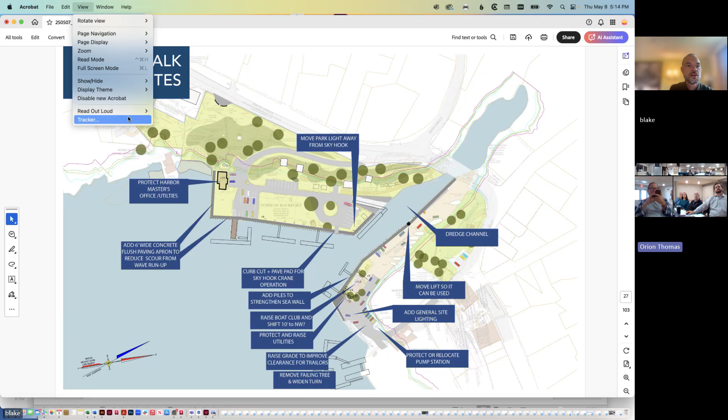Ryan, is it possible to make that full screen? Yeah, I can see back here. Let me see what I can do on my end. I can make it a bit larger. Hopefully that helps. Yeah, that's better.

Oh perfect, okay great. So then after engaging with the boat club folks, we continued on and sequentially made our way around the harbor. I'll just start on this side. So there's a pump station that's lower lying, and there's a need to protect or relocate that facility to ensure it's operable into the future.

There was a suggestion when we were looking at the interface between this area and Rockport Marine that currently there's a little bit of a challenge getting trailers and things into Rockport Marine just at this corner, because those of you familiar may know there's an existing tree out there. The radius is a little bit tight and the tree is not doing well, it's in poor condition. Also, if you look at the grade of the road, what we were hearing is there's a high point that's challenged for clearance for some of those trailers.

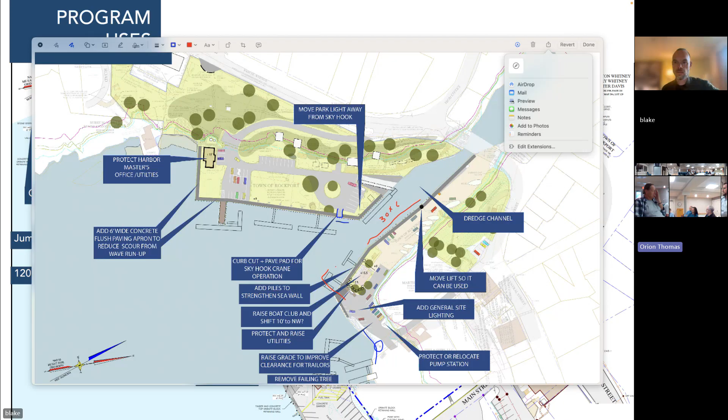It would be helpful for me to understand, so how many years ago did Skyhook operate on the other side? When they first started, I think they've had 2 full seasons where they are now. The first year they tried to do it, I said no, you've got to try it over on the other side, on the dirt side, and that was an absolute calamity.

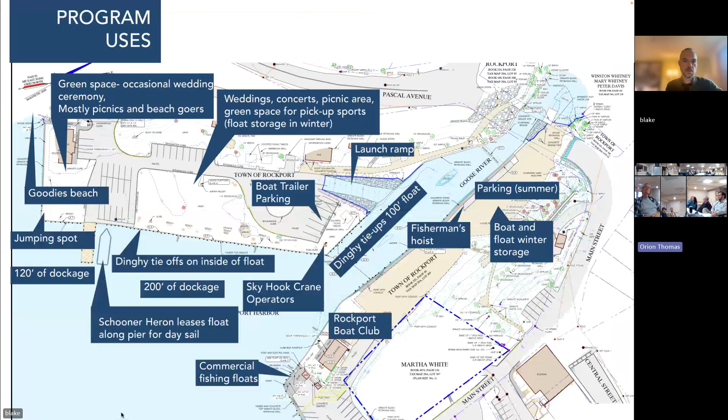So were they near where the hoist is now? They were kind of up by the boat club fence. I don't know if you knew where the best boat spot used to be. It's going to be the closest spot to the boat club.

Yeah, and the conflict is that that's true for the fishermen and for the sailboats - they put their boat alongside, load their gear on. It was not... maybe there's a solution I'm unaware of, maybe if we dredge they could go up the river a little more.

I don't know, but I do know that if the decision is not to put Skyhook there, that wrapped corner space will be a great spot for more dinghies. It's no man's land - it's all about priorities, what we want to prioritize. That's a service people want and we want to see happen somewhere. If it's not going to be there... see those floats down in the corner? If that could continue that float system...

And more, what were some of the issues on the other side, the dirt side? What were the calamities? Well, their boom truck's pretty big, so if they're parallel they have to set up the mast - they need a little bit of real estate. They're bringing their masts in, parking is the total issue, and they have to lay them out to rig them up before they put them on. It's narrow in there, so you get people dropping their kids off, general traffic coming through, then fishermen coming in to load their traps.

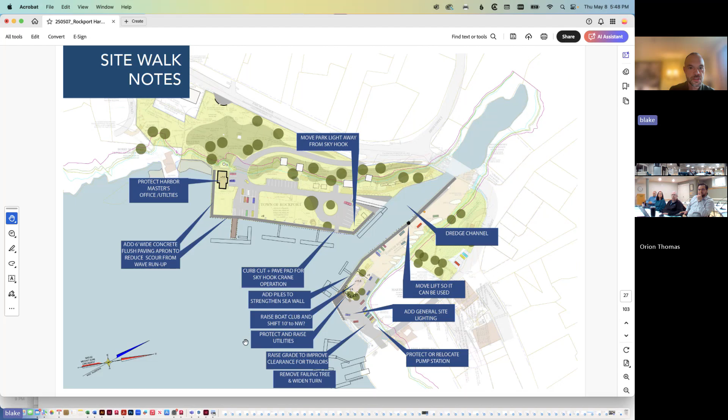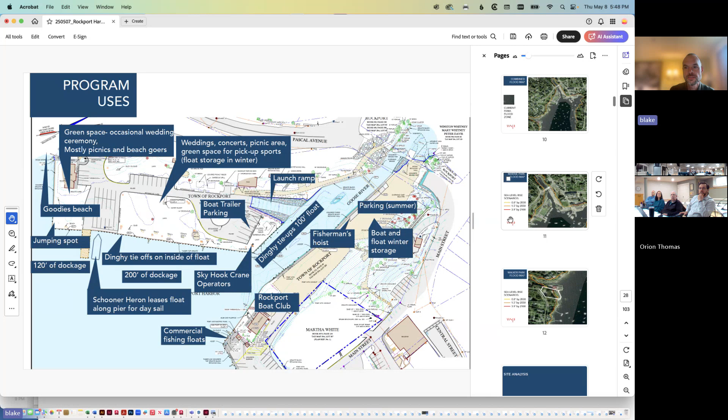So those were just some notes we made during the site walk. And what we've started to develop is the presentation deck, a draft version for the next public meeting. I might go back to the beginning so we can flip through and give you all a sense of what we had in mind, and that way you can let us know what could be better. We've got about 3 weeks to refine this.

Some of the folks who would attend, I guess I can go into full screen mode for y'all. Some folks who will attend this session are likely new to the project, but we don't want to repeat in full what we did in the first one.

So I think quickly we would just recap the project scope, and then we would highlight that the limits are just the public areas that include Marine Park and Walker Park. We'd show them that, as they're probably well aware, there's been impacts from storms, and so this is an opportunity to be proactive instead of reactive.

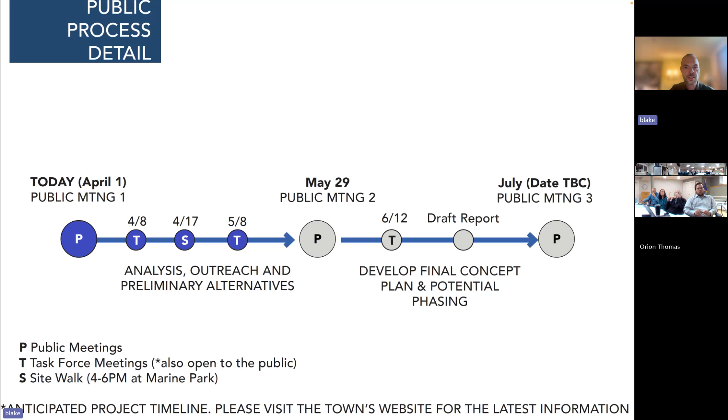We can highlight the project schedule for folks so they understand where we've been and where we're going. We would highlight that they're at the midpoint with the May 29th meeting, and the goal of this meeting is to share some preliminary ideas. There's still time to refine those before a meeting in July. In between those larger public meetings are a series of task force meetings, and also we did that site walk. So this just shows that chronology.

So that was shared with the Harbor Committee, Conservation Commission, Parks and Beautification Commission, the task force, and general community members. So most of the results, by the time we had 131 results, were from the community at large.

We asked if they were aware that flooding has already impacted Rockport during storm events. Almost everyone was aware, but a few people weren't. That tells us we probably don't need to spend a heck of a lot of time recapping the storm activity. I think people are familiar.

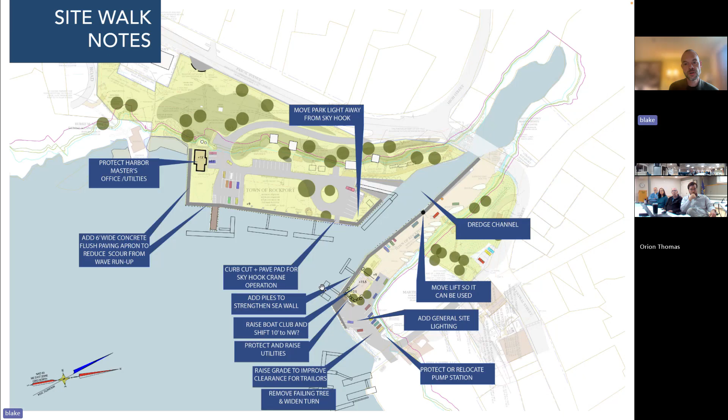We would share the site walk feedback we were thinking after that survey feedback. Just as we just did for this meeting, we can go through this slide. We'll make those updates that you all had mentioned and incorporate that into this one. Then we'll go into 6 key drivers.

Because the responses are so varied, we thought it might be helpful to look at trends. Before we came up with resilience strategies, we thought it would be important to distill all of that information into some guiding principles. So the first key driver is to support the working waterfront.

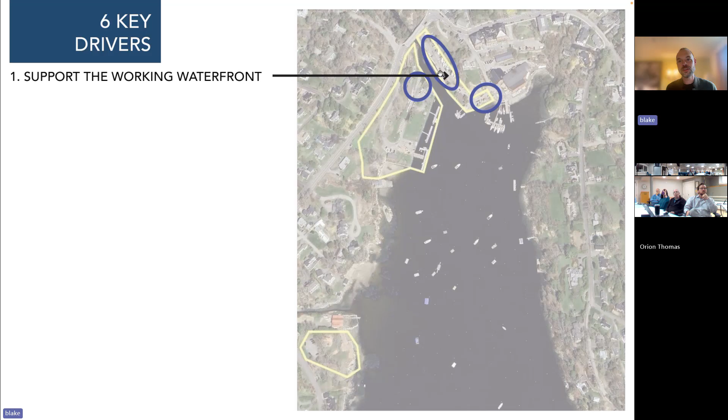I can't tell you how many times I've heard that this boat ramp is absolutely essential. We've talked in great detail about all the activity over here. We certainly understand that that's a key driver for this project. Not to mention that there's likely $2 million in funding to help preserve that into the future, which would be amazing.

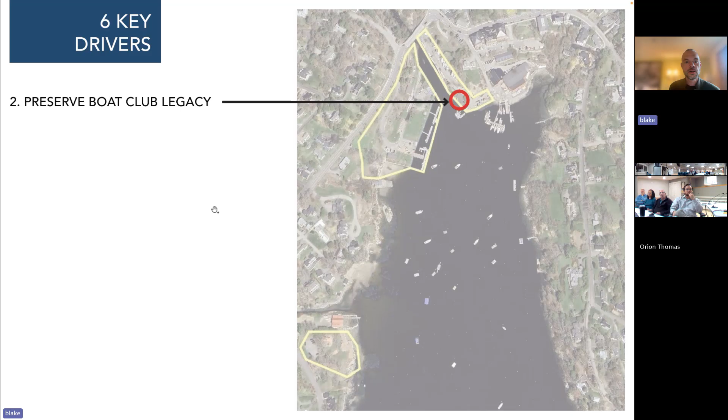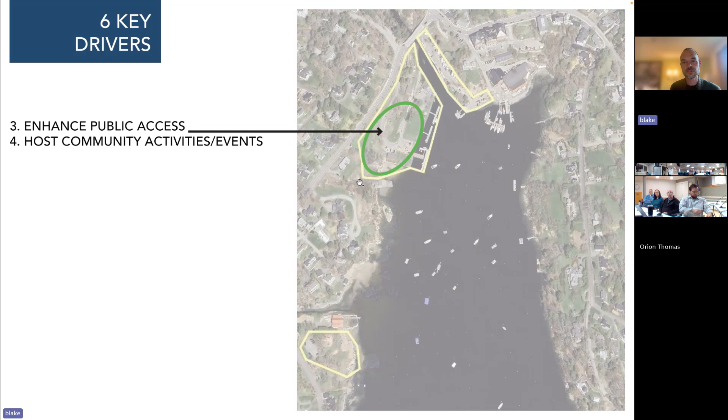And others said that they look to this as a spot to host community activities and events. I think in the last round we talked about some of those, like the donut festivals and various things, but really it's the day-to-day activities also that this open space serves and is so vital.

There's enabling harbor operations - it's awesome that Abby's been so giving of her time. We've learned a lot about the harbor from the harbor master, and just given the location of the harbor master's office and flood mapping, there needs to be thought given to how those operations continue to work in the future.

And then not to forget about Walker Park - that is a really vibrant spot for youth in particular, but another beautiful way to access nature in the harbor. So that might be an opportunity to foster ecology, education, and play.

If you combine all those things, what is starting to appear to us is that hopefully the resulting recommendation isn't one that favors any one group at the expense of the others. So it should be, we feel, to succeed, a balanced solution - where it works for the working waterfront, it still is an awesome public open space, and there's opportunities to enhance ecology. This diagram is getting at the idea that we don't want folks to feel like they need a singular solution, that it should be multifaceted and balanced.

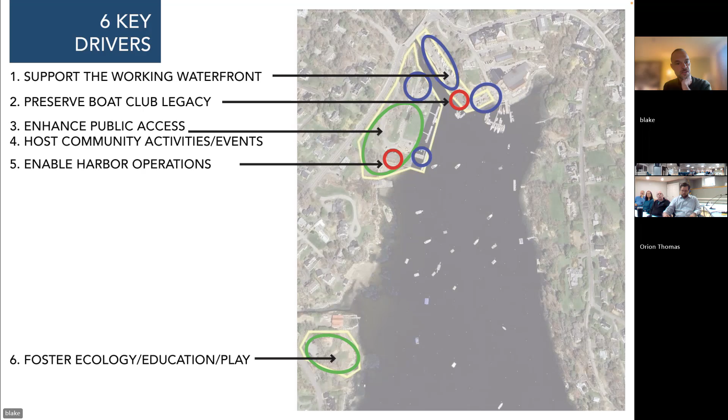So then for draft resilience strategies, what we started to do is just take the site survey and color it in so that hopefully it's more easily understood.

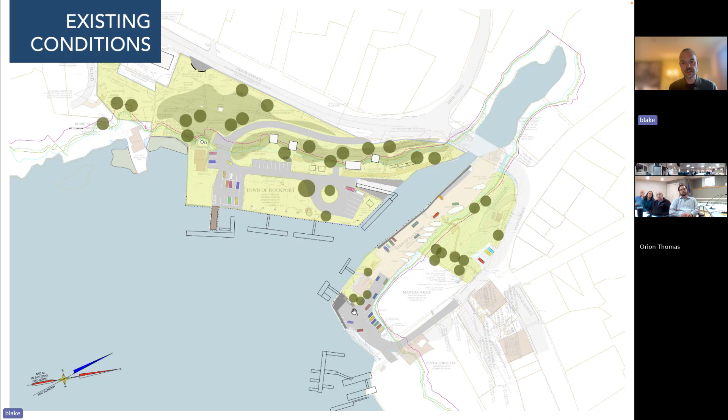So this is just existing conditions that you see today. We can orient people, center town's over here. That's your access in as you currently have it today. The darker green is the sloped area. The white things are your kilns. The light gray is parking and access. And over here, where it's sort of peach, that's the gravel zone for the commercial area. The lighter gray, that's your paved zone, et cetera.

And then we'll talk, I guess, about each of the potential elements. So the first one was just looking at Rockport Boat Club.

And you're all familiar that that's impacted by storms, not just today, but as Todd had shown in the last meeting, by 2100, during a storm event, it is potentially very impacted based on these flood scenarios.

So this building is not very big, which is a good thing. It seems like it would make a lot of sense to elevate this structure. The current elevation is at 9. We're thinking that elevating the finished floor to around 15.5 might be the way to go, because that would mean that your finished floor is meeting your midterm projections, even for the 1% base flood elevation scenario. And if you're going through the expense of lifting a building, you don't really want to go up 1 foot at a time and in 10 years have the same problem on your hands. So the thinking is that you look at that time horizon.

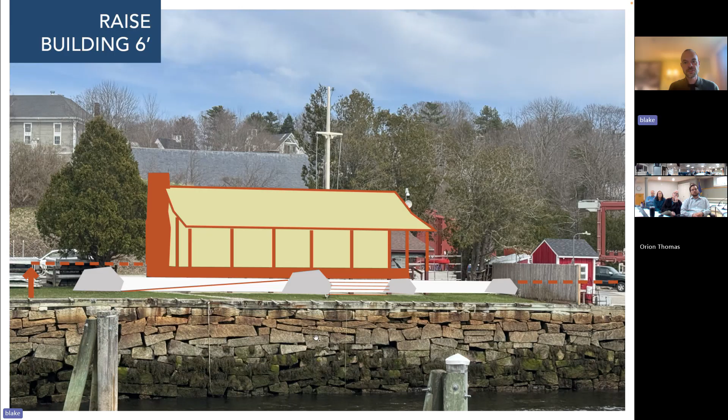So here's an image of the boat club today. Here's just a mock-up of how that might be facilitated. You could raise the building about 6 feet, but you might want to break that into 2 transitions. So there could be about a 3-foot step from the porch down to a landing zone surrounding the building. And then from there, it might be another 3 feet down to existing grade.

And, of course, the masonry chimney piece would need to be considered, but the timber frame building itself should be able to be lifted. Whether they just elect to rebuild the fireplace and that sort of thing, I think that could be done. But this graphic is just saying that might be a way for this building to have minimal change. But I can pause there. I don't know if Nancy or others want to comment on that piece of it.

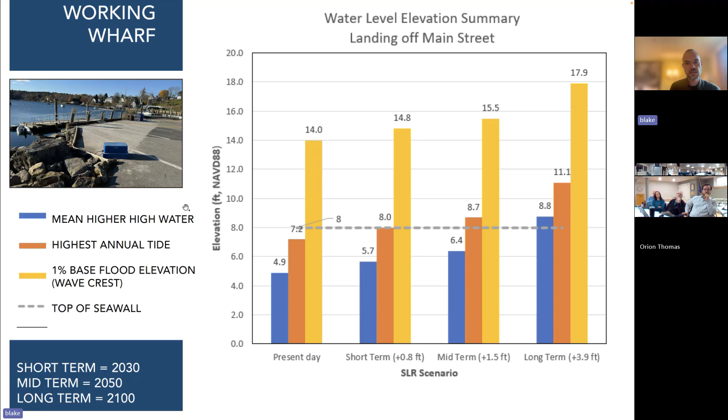It's not so much that this area can't be overtopped. Water going over asphalt or concrete in the middle of a really severe storm event isn't ruining the commercial fishing activity. The issue is some of the utilities in this area, any structures that are part of the operations, need to be located in such a way that they're not impacted.

But if you raise grade like 2 feet, then it might actually work out where you have a better transition over to the boat club, because you've just raised the boat club 6 feet. So if you raise grade here too, then you don't end up with funny conditions where the commercial fishing zone interfaces with the boat club.

And also it sounded like there would be some advantages if this grade is slightly raised from Rockport Marine's standpoint, as I had mentioned, where there was low clearance for trailers. And then from there, you could locally elevate the utilities and any sort of structure above that. So this would still overtop in some scenarios if it's 2 feet higher, but I don't think that's a problem.

And Todd Coffin had said he would just want to model elevating the grade to make sure that there's no unintended consequences from wave energy reverberating off of this. Today's discussion talked a little bit about what happens if there's an extension on this corner. I'm sure Todd Coffin would want to put that in the model too. But if that's just on piles, then I can't imagine that there's a lot of impact associated with that.

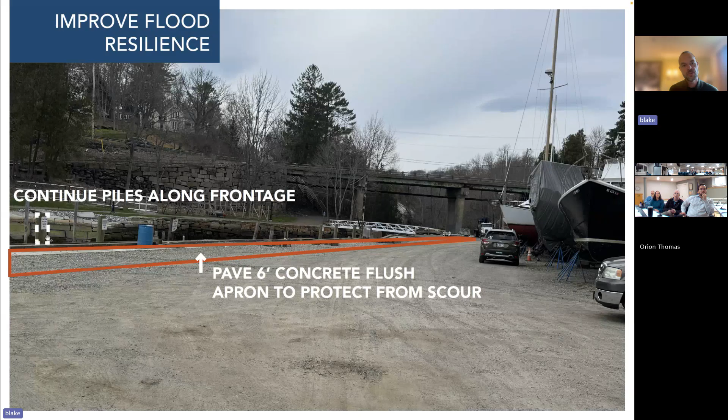And then additional lighting, it could be done in a number of ways, but I just indicated that that would be captured. And then also on this edge of the commercial fishing zone, we had talked about paving a 6 feet concrete apron to protect from scour. So that's captured. And these piles that you see here could be continued along the waterfront.

For Skyhook, if it did move to the working waterfront side, there are examples of kind of cool supergraphics. They have been used in commercial settings also for designating where different uses happen. So one thought was, I know that people think of the park side as sort of the park and this side as the working waterfront.

But if you're going through the process of elevating a portion of it and paving it, and you're trying to make sure that people know where to go, or if you're a pedestrian, like this is not the middle of the walkway, this is where Skyhook goes. There could be some interesting or creative ways to mark uses so that it's clear to the public and easier for the operators to function.

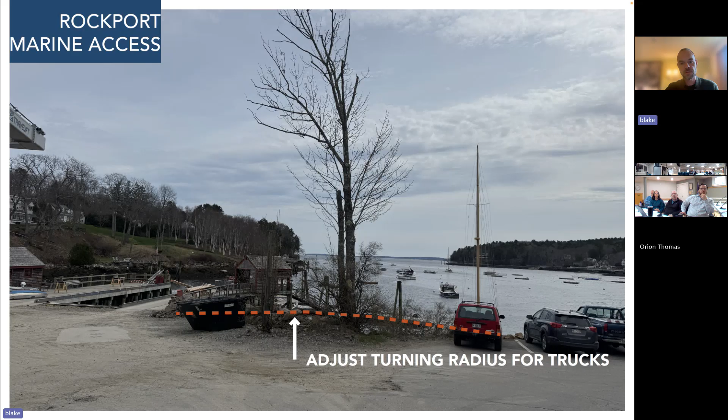This was that corner toward Rockport Marine where we need to adjust the turning radius. You can see the state of that tree on the last visit. It's not doing so well. And oftentimes where there are projects like this, rather than trying to keep a poorly located tree that's failing, there's an opportunity to plant new trees in better locations that are healthy and actually in the long term are going to provide a lot more habitat than what this thing would do. So there might be a scenario like that for those who might be concerned about that particular tree.

So any questions on that side before we go to the park side?

Yeah, when we were talking about raising the grade 2 feet, what do you do on the water side? And this actually applies to the whole area here. Do you just add more riprap, or do you put in those corrugated sheets, sheet piles, or do you just put more granite blocks? Adding pilings in front of the granite blocks just doesn't seem real strong. It certainly adds to the atmosphere, but are we gonna want to start putting in some of these sheet pilings to protect the granite behind it? How does that get handled?

Yeah, I think you asked a really good question. Todd Coffin has talked about the various options, and just as you were running through them, they have different pros and cons. We haven't landed on one specific edge condition just yet. The thought was first, if we test the waters with raising grade at this elevation, and folks are saying yes, that'd be helpful for the reasons you identified, and it would also work well with the boat club, then I think the next step is, okay, so what does that edge look like?

Even though the granite might look better to some, you might end up with riprap that's less costly here to save your pennies for something else that's more important. I could see it developing that way. I don't know if that makes sense. Yeah, sure, and it might be different solutions in different areas. Yes, I'm sure it would be as well.

So that was the commercial side of things. And then on the park side, after going back to the site a number of times and thinking about what we're learning through the discussions to date, it seems like this is not a location where every inch of this park needs to be waterproofed. Like we talked about with the commercial side, having waves come over the top can be acceptable, and there are lots of communities that live with floodable parks that are just designed to flood. The problem right now is that this park wasn't really designed to flood, so when it floods, it fails.

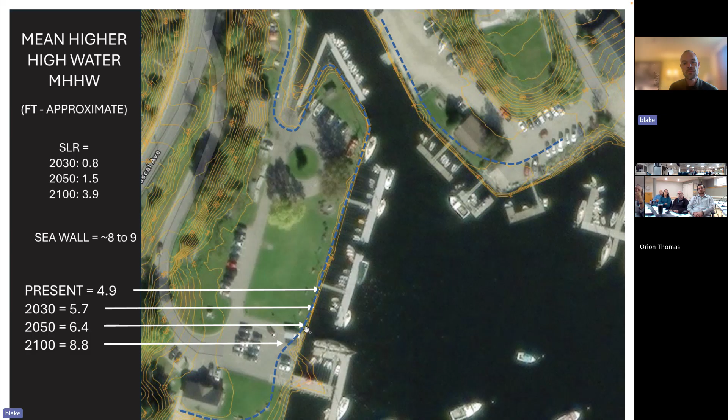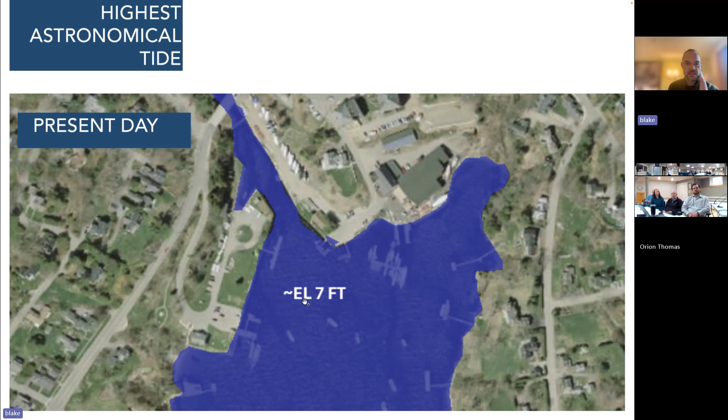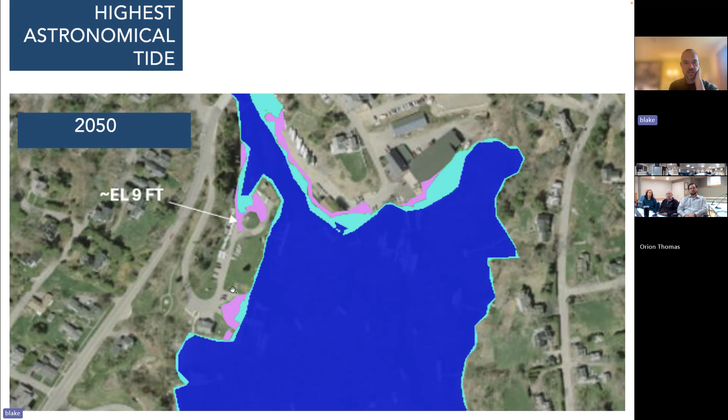So rather than trying to keep the water out 100%, the thinking is, what could we do to improve the resilience of the park and at the same time make it work for all the different uses that people have brought forward. This was showing the highest astronomical tide flooding in present day, 2030, 2050, and 2100. By 2100, you're up to 11 feet at the toe of slope. But it's incremental, so we may not have to make all the changes to this zone right away, because by 2050 it's anticipated there'd be a lot less flooding even during the highest astronomical tide.

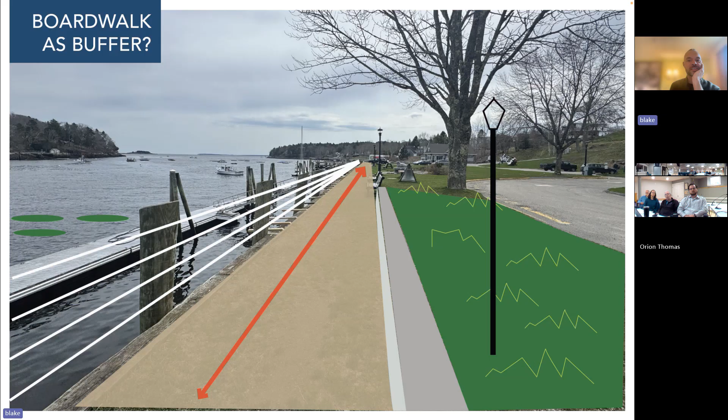So one thought was, if you were creating an apron to help reduce the amount of scour, could that ever become a sort of public boardwalk, giving you an accessible path at the edge of the park? One of the things folks think about when designing circulation networks and paths is what happens if you're in a wheelchair or a walker, how does everyone use this park? One thing that would be enhanced greatly by having a hardened surface at the edge is that it becomes universally accessible, basically better for ADA access. The surface could be raw concrete, but there are other projects where that concrete is laminated with timber, and this isn't the same construction as your typical flimsy deck. These things are built with details that are way more robust, anticipating that water will overtop.

But when it does flood, it's fine. It just floods in certain conditions, and then the flood waters withdraw and it's fine. So it could be a timber surface, stone, or just raw concrete. But the point is that maybe a circulation network develops that makes it more accessible and provides greater resilience, so you don't have to repair as much at the end of the day.

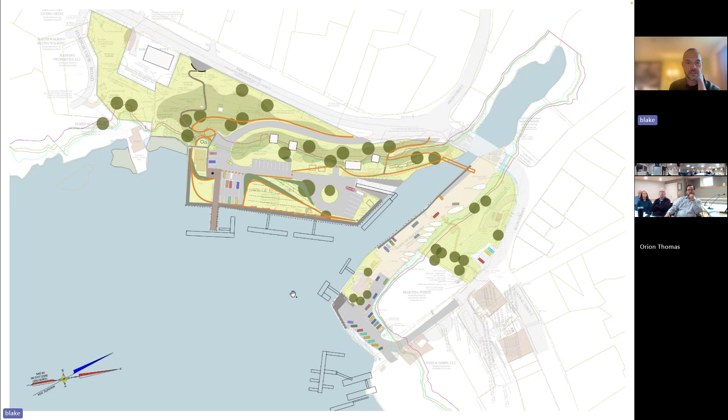And it would work much as it does today. But over time, you could fill in and raise portions of the park. We would see that happening through a landscape strategy. You've already got a really big slope leading from the park uphill to town.

But there could be additional topography or mounds created that help raise some portions of the park out of floodwaters over time, and also create spaces so that even if there's a turnaround or parking for the boat ramp on one side of the park, if you mound up toward that end, then when you're in the park you're not looking right at tailpipes and exhaust and everybody queuing. You're reoriented back toward the water because of the slope. So there could be some benefits to topography.

A lot of people would hope that the biodiversity of the park might be enhanced. Right now there's a lot of lawn, which requires a heck of a lot of mowing. If there are opportunities to create planting pockets in the park, you'd be creating more habitat for wildlife, also treating stormwater, and you'd have less to mow. So there might be a way to balance those things together.

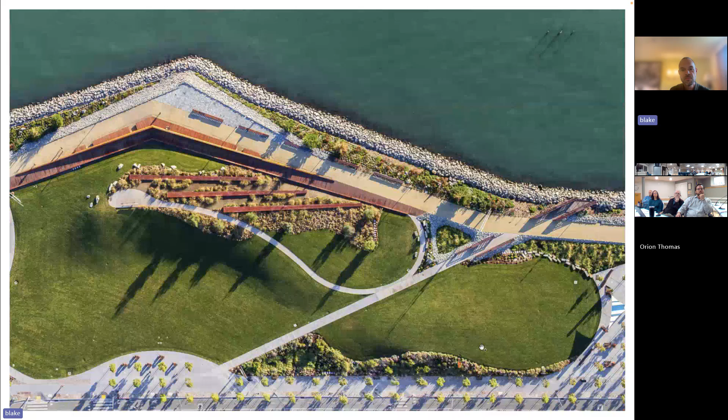These are other examples of how projects or communities have integrated topography along with a boardwalk at the edge. They could look more modern or more rustic, but the overall intent is that when you're making a floodable park and embracing change over time, it gets coordinated in this way. You'd still be able to have your bigger events out there.

Any comments on the park piece?

I mean, if it were to be hardened, then you're right, that might provide opportunity for access. I guess the other question is, we would probably want to have, as someone mentioned earlier—I guess it was Abby—some way of demarcating that the public is not supposed to continue walking right on the edge of that spot.

Looking at the circulation diagram, I'll show you an idea about creating an access point. Today, as I'm sure you all know, you can go from the location up here down the slope and then hit a really steep stair, which isn't so great. But in the future, there's a thought that you might be able to have that ramp continue and create an accessible path from the upland to the park level that's ADA accessible. It's also bikeable and just a pleasant way to get down there.

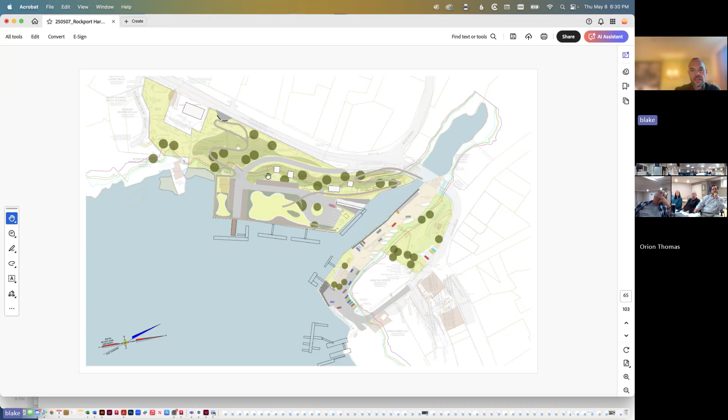It's a little less frisbee friendly, or kicking a ball around, but I agree - that's why I thought this idea of pushing the parking up makes sense, because if you do that, then you get the same width you have today, and this connection here we don't have to have.

If folks are fine with just extending access in the form of sort of a boardwalk there, we could get rid of this vehicular access and you would have big park space. I mean, is that what you think the Parks Committee would want?

I think it would be really nice to have it as wide as you have today, but not cut up with cars. I like that - into the hill. And would you keep the main area of the park, not next to Abby's office, but the stuff to the right - would you keep that the same elevation, or change the grade in there?

I think, Bill, we would recommend elevating grade over time. I would elevate it at this edge, because then you're buffering the noise and exhaust happening over here, and giving people elevated spots to look out toward the harbor. With a railing, it's kind of cool to elevate this so people are looking up over the rail, over each other, and you'd probably have better views out to the water as a result.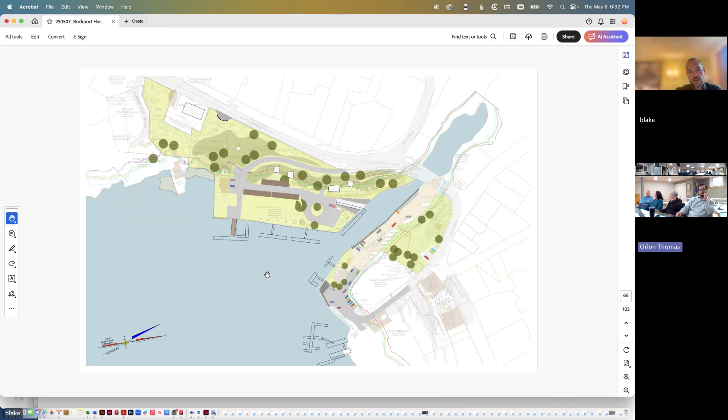Does this concept we're looking at now have the hardened boardwalk? It should - I can add it in. I think all of them should have that.

Does the harbor need vehicle access for the people in wheelchairs and on the boat? It still could be ADA without vehicular access. I think it'd be good to have a provisional access - you could occasionally get there if you needed to, but it wouldn't be open to all cars. The challenge with this one is the turning radius, right?

I think we talked to Todd a little bit about exploring different entrance and egress to the park. Has that been considered at all? Yep, so there is that study.

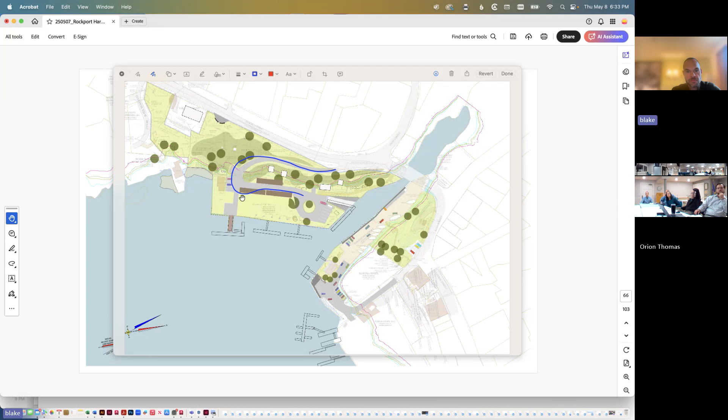So I think with this one, Bill, we can just realign the parking so you still get that thickened spot. In terms of Abby's question about what happens for additional access - you're talking about the study that brought another access point in here, right? Like an in and an out, like a one way in, one way out.

Yeah, that could be done. Right now we're not planning anything in here, so maybe what we do is show that on the plan as a dash, and then we could talk to folks about that being included. I think what I've heard so far is that it's probably pretty costly to put the road in, so it will come down in the end to what people want to invest in from a funding standpoint, and how important that additional access is.

It would certainly be nice - I can tell today that this is pretty tight, and you have to do some gymnastics to get into this from a certain direction. Is it worth it? Have we had a major issue there? We've had plenty of vehicles get hung up on the rail trying to turn right.

One question about this concept - if we shorten the distance from the bulkhead wall to the parking area, in other words the park area, and we have the parking immediately adjacent to the park, on the east side if you will, then people don't have to cross the street or the driving area.

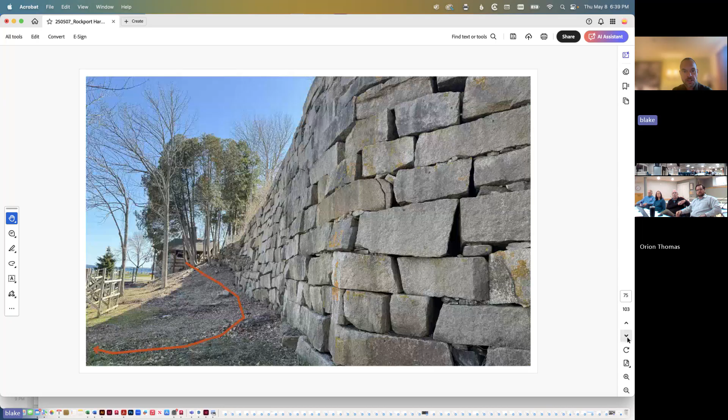So this path becomes just a gradual descent. And if the bridge gets replaced and has sidewalks or bike facilities associated with it that lead you to town, then you could see people going from the middle of town out and down this ramp to the waterfront, which I think could be really good. It brings people close to this wall, which is a cool feature, and you could still have your kayak launch. That's kind of the new point of connection we had in mind. We also looked at the other points of connection, and we could share the various ways people would be able to access the site in the future if we click through what that sequence looks like.

Just for the record, the new bridge going in about a year and a half from now does have a sidewalk on the harbor side of the bridge - actually it has one on both sides. The one on the harbor side will have sidewalks starting down next to the driveway there, so it'll be on the river side of the main driveway. But we probably should somehow get together with you to show you the preliminary bridge designs we're working on, to see how we sewed it together into one nice sidewalk pathway.

Has that been issued? Conceptual? No, it's all being digested right now. I think that would be awesome. If you're able to email anything, that's great, or I'm available if you want to meet or do a call, just let me know.

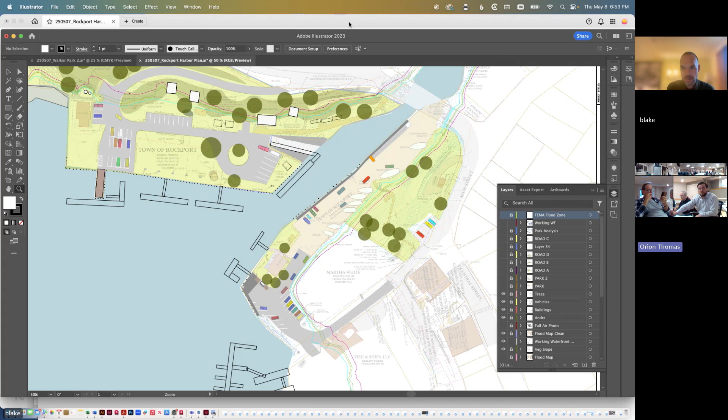Congratulations, looks good, thank you. Thanks, Blake. Thanks. Bye. See ya, thanks.